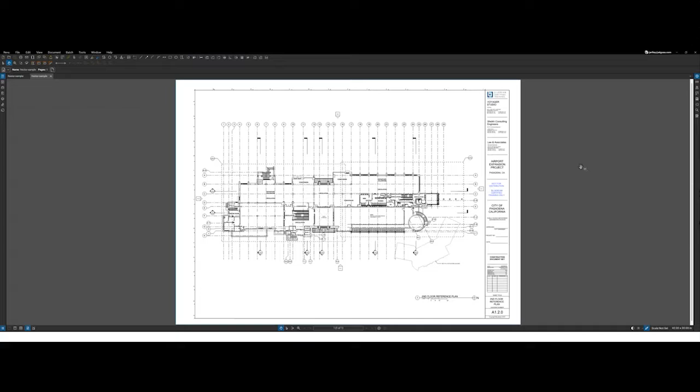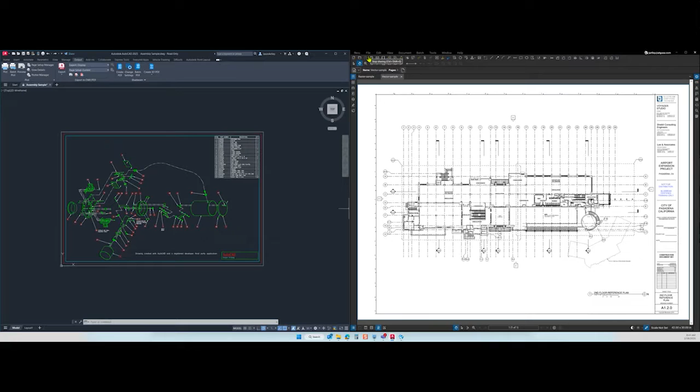While we're in here, let's talk about this. This screen size is why it looks stretched, correct? Yep, so if you were to get a larger monitor, this is a good keynote here, you get a lot more real estate on your viewing space. So if you were to split screen, which I know you will at some point, it's pretty cool. Well yeah, worth an investment of a larger screen, right? Yeah, it's the same as having two monitors, but there's no dividing stuff in the middle. What size is it? It's 34-inch ultra wide. They're really cheap actually right now. I tried to hurry because I thought tariffs were going to mess with things, but it was on sale, so not too bad. The price range is crazy, this was $250, they go up to like 2 grand, and there's not a whole lot in the middle.

So, but anyhow, let's go back. I would assume it's like hertz changing and quality, right? Probably, like your refresh rate is essentially what's happening with your hertz. So basically it's like 144, I'm assuming, and then you probably get more when you get higher up the line, past 144 you're probably paying more for that. So your refresh rate of your screen, I think, is essentially what this is. It was 160 hertz or 180, and then 1 millisecond response time, I think those are the specs.

All right, so I'm just sharing Bluebeam now. Tried to make it a little bit more aspect ratio friendly, hopefully that works well for our content.

But here's our sample, you've seen us share this file multiple times, but what's the difference between raster and vector? Somebody, I don't remember where I saw it, but there's actually reasoning behind the names, so that might be something to Google. I always think of what is it, the airplane, what's your vector, Victor? But yeah, you zoom in and things are crisp, that's the easy way to tell if it's a vector image, which also means it's going to be easy for Bluebeam to interact and snap to things, because it knows where to find those crisp lines.

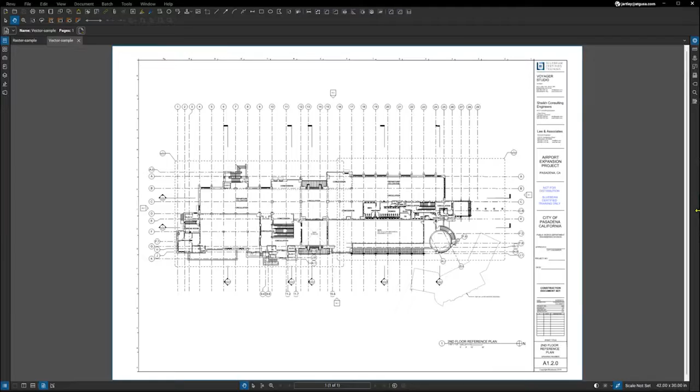They're not seeing the split screen. Not seeing the split screen? Yeah, I think it's frozen. Interesting. Cool, unshare and reshare. I had just shared the Bluebeam. Yeah, that's why. Give you both? Yeah. No. Okay. Yeah.

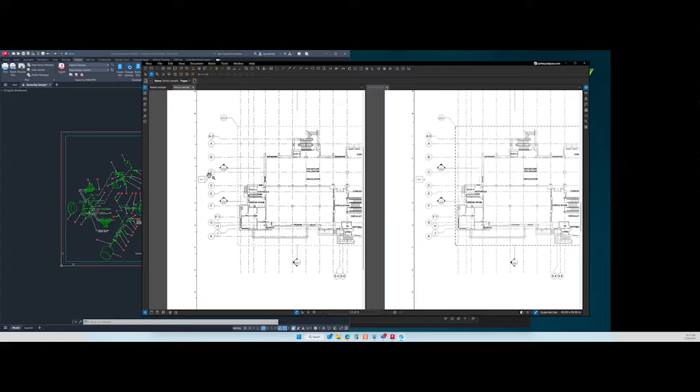But yeah, the old workflow. They're sending a PDF, somebody prints it out, they scan it, or they do their markups with a pen, marker, or pencil. Then they scan it and email it back. And when you email it back, you're going to get a raster image, which means it's going to look sloppy. It's just going to get worse and worse, and you're wasting time, you're wasting paper.

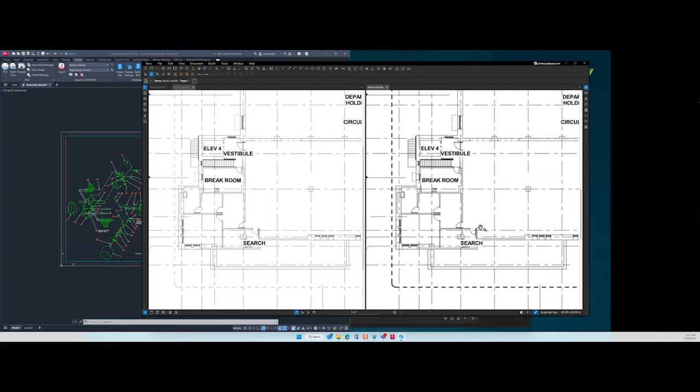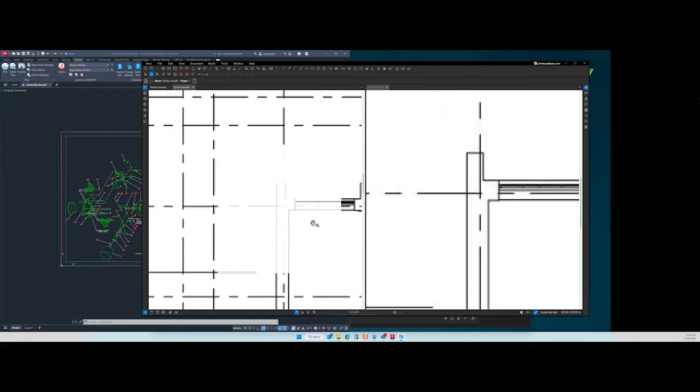I get the tactile feeling, I get the ASMR of wanting to write on paper, but you don't have to do that anymore, and the time savings is incredible. You can accomplish something similar. I had a conversation with a company where somebody was in that same vein - maybe not like feeling the lead against the paper, but a stylus with an iPad. Yeah, the Apple Pencil. And some of them even make that little noise. I've seen someone - it's like an electric car where it can make the speaker sound.

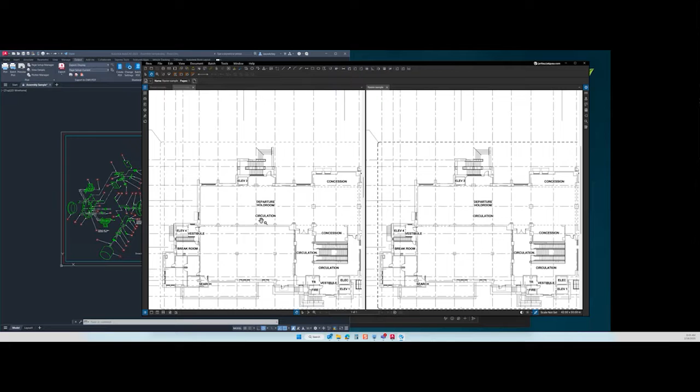So to address the challenge of reasoning about vector graphics, the visually descriptive language, or VDLM, uses scalable vector graphics (SVG) for a more precise visual description, and an off-the-shelf raster-to-SVG algorithm for encoding. The model aims to enable precise visual perception and facilitate high-level reasoning based on low-level perceptions. Additionally, differentiable rasterization bridges the vector graphics and raster image domains. So that's just a quick Google of the reasoning behind the names.

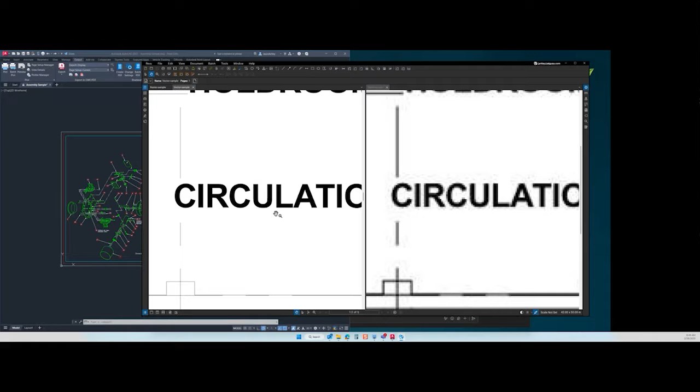Yeah, I'm not sure that illuminated anything for me, but thanks for looking it up. Okay, let's talk about another difference, a big difference here.

With raster, you lose that text integrity. Now you can go in and edit text on a vector-based one, right? So if I want to put a space there or whatever, I can do that. I cannot do that in a raster, right? Even if I run - where's it at? Yeah, it just grays it out.

You can't do anything. Also, it didn't really like me editing that - see how those characters didn't fully... Okay, now I'm confused. Hey, I had to hit email. Don't need to do that. That's really wild, why did it do that?

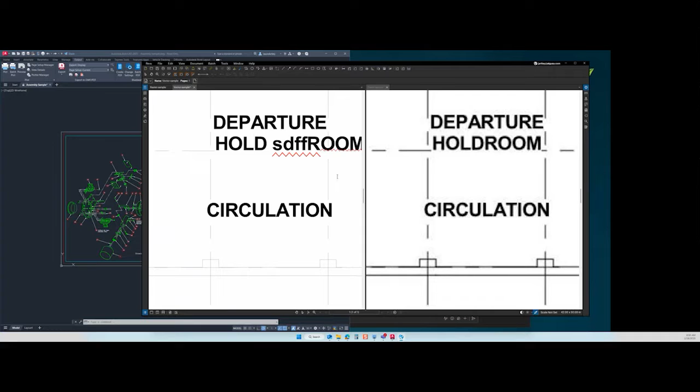You see that? So this was 'hold room,' right? But then I went and did this, and you can see the letters there. But when I cancel out, watch what happens. It says I'm misspelled, and then when I zoomed, it had squares. Now it's not doing it. There it goes, I clicked out. I think it's trying to save that data into actual text format, and it couldn't characterize it. That's a wild little bug.

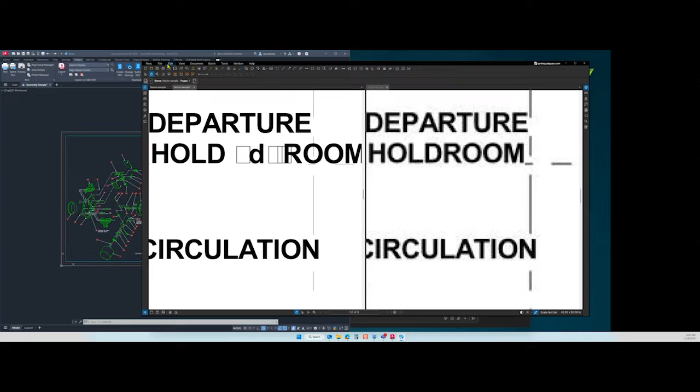They're not even the same size, right? Interesting. Well, anyway, assume I didn't do that. You can edit text. Now, if you have a raster...

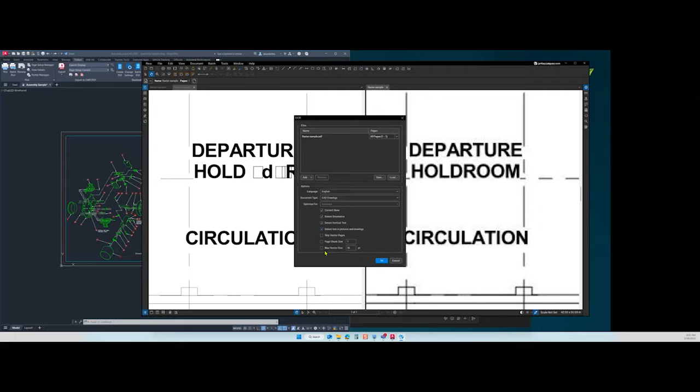I was going to say, you don't have to have the fancy version of Revu anymore to run OCR. Now we have the ability to run OCR on a CAD drawing, English, correct, detect... sure, do that. We've got no picture - yeah, we'll leave that on there. Skip vector pages, okay. Hopefully this doesn't take forever, it's just one page. But back in the day, you had to have the high-end version of Revu for OCR. Now it comes in the basic one.

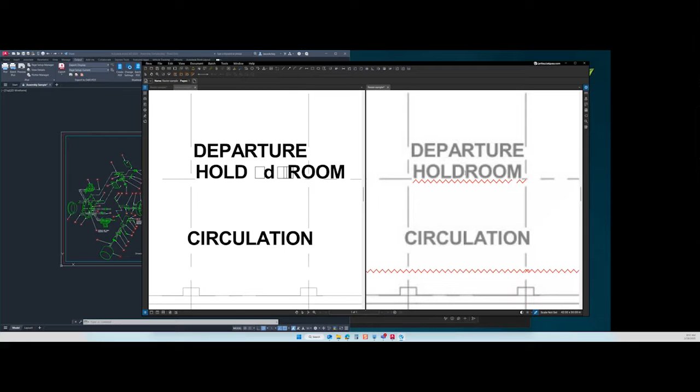So I run OCR. I still cannot edit text. No, right? So it says I can. It's trying to. It's not doing anything.

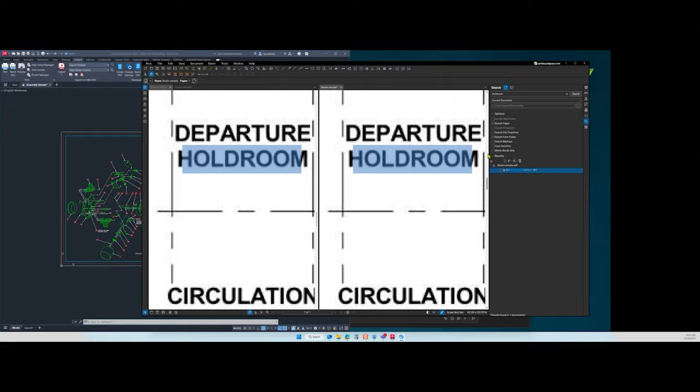Yeah, because what it does is OCR enables and enhances text in the image quality. I know people have asked about running OCR and being able to snap to content. It's specifically for text. Optical character recognition is the technology that converts different types of documents, such as scanned PDFs and images of text, into editable and searchable digital text. It says editable, but for some you may not be able to, depending on the quality of the raster.

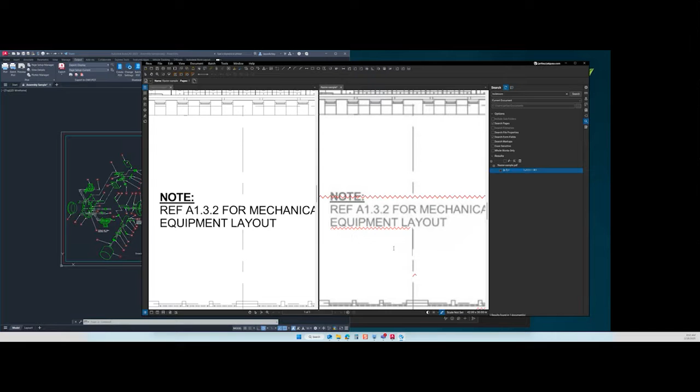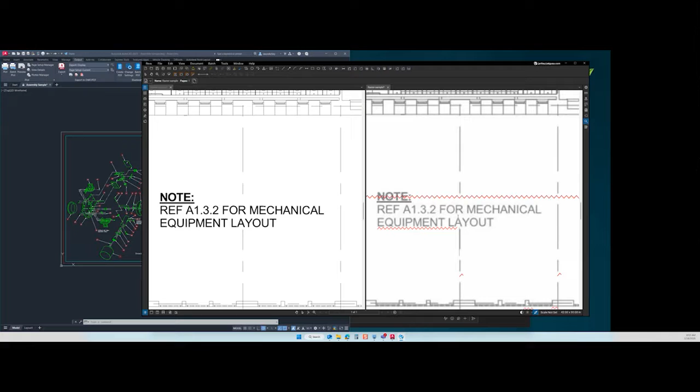And to come back full circle, a better explanation of raster, which may resonate more, is compressed pixels and raster images. So you have JPEGs, you have PNGs, which lose quality when scaled and is commonly used in photography in complex textures. Vectors are made of a path of mathematical formulas, vector files. So pretty wild. Yeah, it's not letting me edit any text.

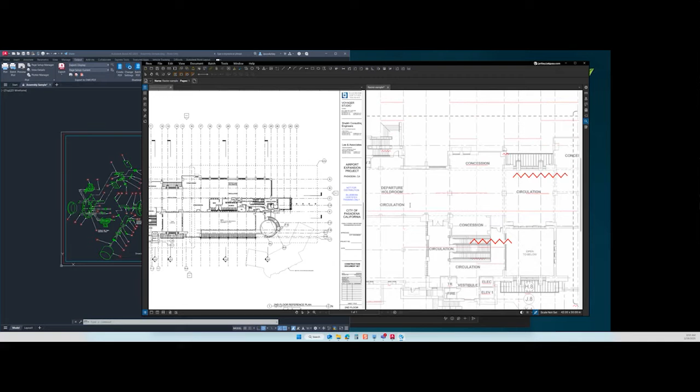You're going to be limited to scan quality, as you mentioned, DPIs and all that, and then also what fonts you have. Some fonts are Windows TrueType, which hopefully Revu does a little better with. But overall, OCR did make a mess of this drawing because it's trying to do spell check, and it's finding things that it thought was text.

Hard to tell, but it looks like it's trying to edit it versus just search it, right? So if you exit it, at least you can still select it. Yeah, it thinks that's an I though, right? There may be something in there from the CAD file that's underneath it, maybe.

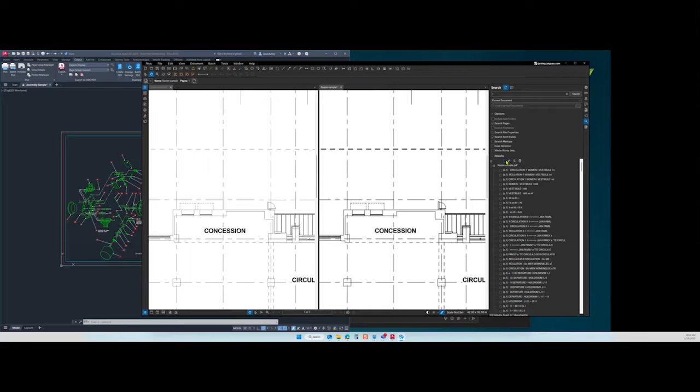Yeah, it thinks that's an I. All those dashes, interesting. So, I mean, it is what it is, but that could wreak havoc for sure. That was a fun little test.

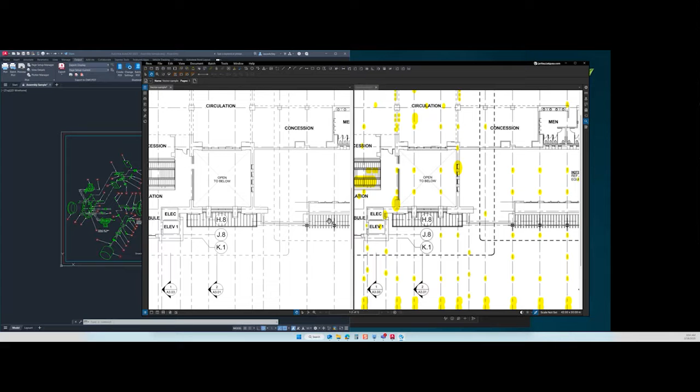What other things do we need to be concerned with if we're looking at raster and vector? When was the last time you were emailed a raster PDF? I actually just had a conversation yesterday with somebody who printed out of AutoCAD, and it printed out as a raster. So just be aware whenever you're doing your print settings that there is a selection box in your solution to make sure it's vector versus raster.

I'll give you all a caveat in Revit. There is a primary auto function to raster for shadows enabled. So you're going to automatically get shadows. If you put shadows on, you're going to automatically get a raster-based PDF because it's images for enabling shadows. But everything outside of that is typically vector, and there's a selection, just a yes-no parameter, or I guess not really a parameter, but code behind the export, where if you select vector, that's usually the default. But if you select raster, be aware you're going to have those issues when printing out.

So you can accidentally print via raster versus vector. There's a lot of different drawbacks, and since you said the A word, we're going to talk about it too, because Brian brought it up as well. I did that OCR in Bluebeam Revu, and it wouldn't let me edit the text in the PDF. Brian says you can do that in Acrobat, but I'm guessing it would still vary on the quality. I bet if I had a different raster sample, I might get lucky, depending on the font and the worlds aligning and dogs and cats living together, all that stuff, where I could edit the text in a raster in Revu, but this sample doesn't work.

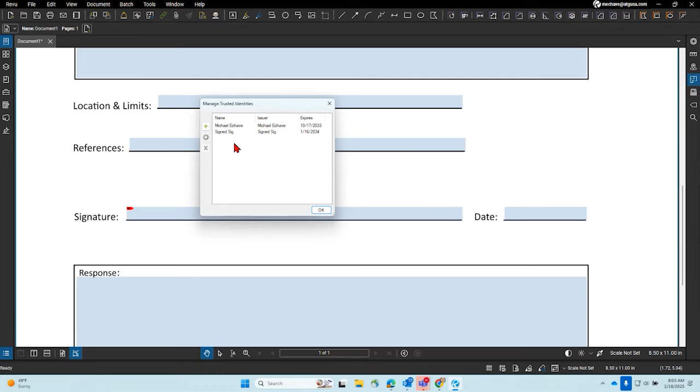It's either by the Windows certificate via Bluebeam - I guess I need to stop saying Windows - the validation and credentials from Bluebeam or from an external party member, which is saved to your computer. When we were talking about this earlier, and I was sending things to Jason when we did this at one point, it's these trusted identities that then you can see if it's validated when you're opening up the PDF again. Otherwise it's yellow, and we'll go through and show these examples.

So I'll save this as MCR. Look at my desktop - on your desktop is MCR, and there's already one. So what I'll do is I'll save it here, but I'm going to go through and sign it.

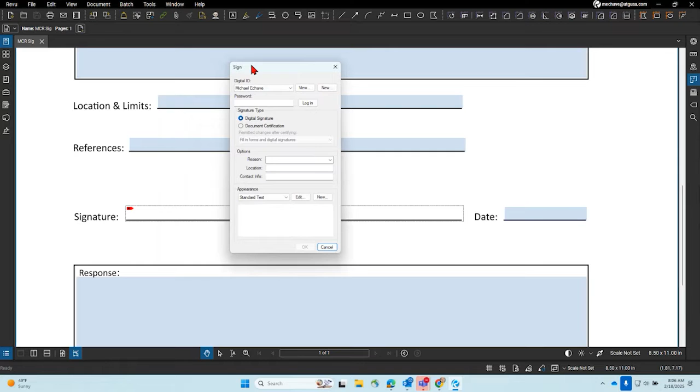Creating a digital signature is one of the things that you will want to do for signing PDFs in Revu, and this can be for authenticating your seals as well. There's a couple of different ways, we've done a bunch of videos on that, that's not where we're going to get to today. That's the wrong password - did I do that? Cool, I did that. So if I go through and sign this, you have to resave it over, so I'll just resave - yes, replace.

You have the ability to go and look at your signatures here, and this is authenticated because I have my valid authority within my local computer. I think, Jason, maybe you sign something, or maybe I send this to you - one of the two things that we could do. But we'll continue onward, if somebody's wondering from that perspective, we can send something to Jason. But if I go back to signatures, you can also validate your signatures and make sure that they are valid for what the location is for them.

You also have digital IDs - a digital ID is what it is, not trusted identities. So you want to be able to import these in order to authenticate what that checkbox is. Otherwise it becomes yellow. So if there's a different signature that's not part of this, it will be yellow because it's not valid yet.

Oh boy, this is an interesting topic, right? Because as Brian mentioned, and this has come up before, third-party certificate providers have reviewing agencies that prohibit self-certifying, but it's a Windows certificate. I'm not Microsoft, are you Microsoft? So is that technically self-certifying though? But yeah, Entrust is one that I've heard come up. There's a couple other ones out there too, but it becomes a big problem.

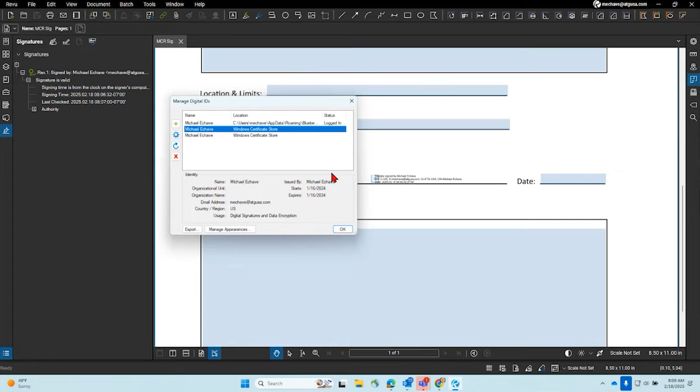Yes, so this is the downstream effect when people are using the data that's in there, is coming into here, creating a digital signature, signing, or there's also the ability to secure the document, but I think there's certify as well, which is in that same vein.

So you can certify a document without signing it. So if I redo a new one here, and we'll just do a fax form for this example.

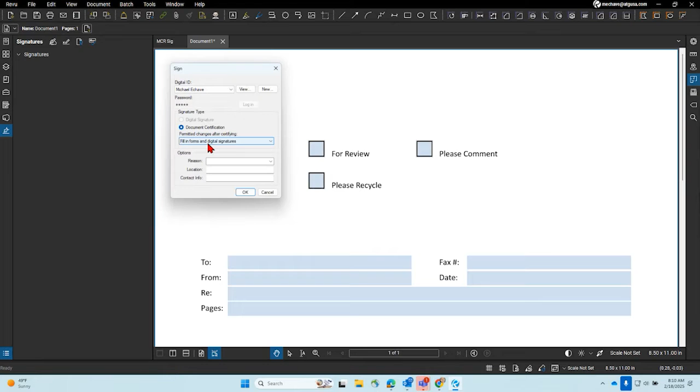But if I come into here and I say certify this document, this is essentially going to allow people to still do some things if you wanted them to. And what's the reasoning? I have not. Cool, cool, cool. So we'll hit this. It's going to ask me to save it.

Now I have a certify on this document, right? So it's given a blue indication that this is certified by me, which is also allowing editable for your forms because that's what I said, but it will create a pop-up for when someone receives it.

So there are a couple of ways to authenticate PDFs, one via signature, one via certified, but then it also comes down to those Windows certificates of when somebody receives it, is it truly authenticating it? So if I go to my digital IDs, what certificate are you using, third party?

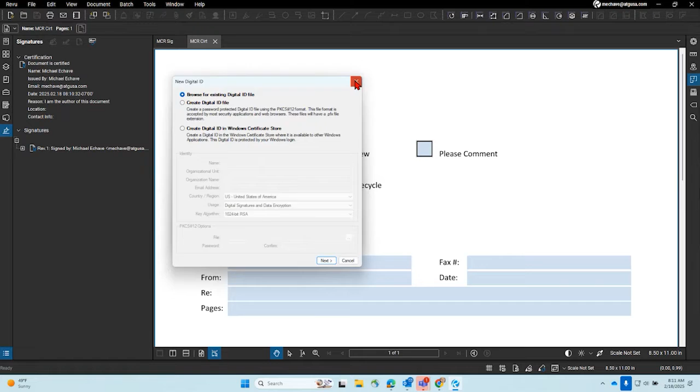Do you need to share it? Because this is where you would add somebody's, or create, well that one's create your own. But you have the ability to run through these certificates. So there's definitely a downstream effect when you go through and use some of these.

The other, yeah, wasn't there other locations to find the certificates in here? Wasn't there a link somewhere? Maybe. I thought there was like a place to go find more. I know there was, I can import, yeah, I can export mine to share it with you.

So whenever you receive a document from me, it's authenticated, right? You don't have any hiccups down the road. We figured that out. But this is something that is definitely being required by some municipalities, right, for submitting the CD sets. Now, those submitted CD sets are to the city.

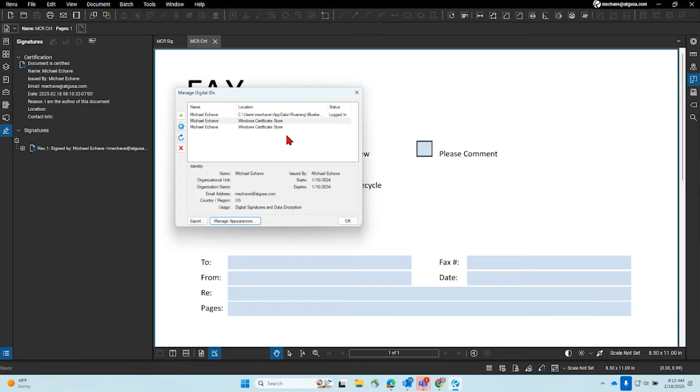Now, does that mean you as a firm can just send out sets that aren't certified to everyone else? Or do you have to send out the certified sets to the subdisciplines and contractors? That's a good question for the audience out there. So it's fine for the CD set, but not for the IFC set.

Yeah, so you would want to make sure that you're not sending forward to city, or well, you can digitally submit now, but if you were, I remember we had paper runners back in the day, right? Yeah, I was one of them. But basically, don't send the same forwarded set to everyone else, right? That way there's no downstream effect with locking down PDFs and making it more work for those end users as well.

Pretty wild. As Brian mentioned, some of these agencies don't allow you to self-certify, you have to have a certification, but it can't be self-certify. That's just... so you can't? Well, that makes no sense. What's a self-certified then comparative to what they offer? Isn't that kind of the same?

Do you have to use an add-in? It sounds like the signature certifying lobby has infiltrated these reviewing agencies. Because back in the day, just a signature was a signature.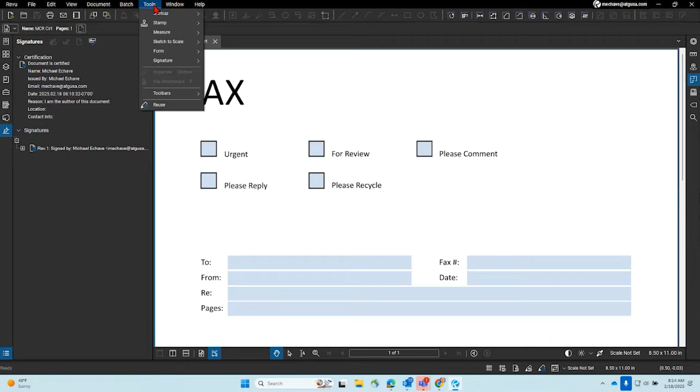So Brian, they have to purchase a certificate from a third party in order to submit to this particular reviewing agency. That is insane. It's not saying you can't self-certify, it's saying you can, but it has to come from a third party.

Self-certified is different from self-signing. I'm putting the two and two together. So you can have a certificate that's third party that's applied to the signature you're applying to the PDF. That was confusing to me - I thought signing was your certification, but your certification, which is authenticating the document, is tied to the signature. Does that make sense?

Yeah, but now you have to pay somebody to do this. Of course. That costs extra.

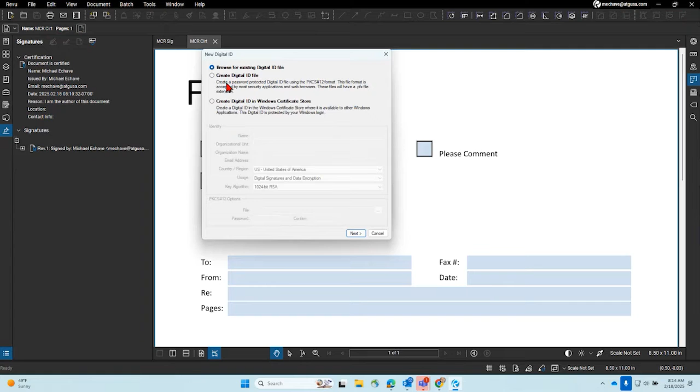So if you wanted to, you can do this from a Windows certificate, right? Or you can create an ID profile that logs to that file location itself. So if you're purchasing a certificate from somewhere else, you can still use that in Bluebeam to sign and point to that certificate. But as people are making us aware, they are requiring you to not use something like a Bluebeam certificate - they're requiring you to purchase a third party certificate.

Is this a Colorado thing, Brian? So it's 124 bucks a year is what he says. Wow, that's a little over 10 bucks a month for what? New Jersey - New Jersey is very complicated. We've been doing some work up there too, and it's like, where did this requirement come from? What's the rationale behind this?

It's probably saying ours are more valid, and they created some type of case against it, and now people are requiring it, which to me is so the municipality or whoever is receiving this certificate is saying that this third party is a more secure signature than your native local Windows certificate. So maybe they're worried about cybersecurity and being hacked, and someone using that Windows certificate where this third party hasn't been hacked yet, and they're validating that this is more secure. Maybe that's the reasoning - it definitely could be.

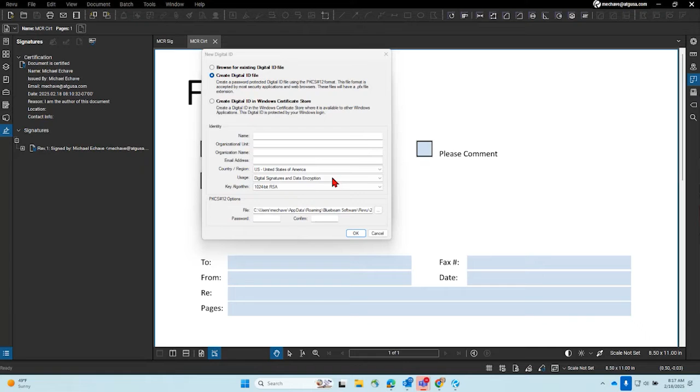We've talked about this before when we were talking about using Bluebeam Studio for evil - so this is where we're collaborating on a studio session or project, and I get fired, but I've downloaded a free trial at home, and I can still log in and mess with the plans while they're out for bid or construction, and change specs and edit the PDF in a devious way. I would never do this, of course, but this would prevent it, because if you were termed and you download on your local computer, that Windows certificate's going to be different.

So interesting. For third-party use, the browse for existing digital ID file option - looking for recommendations on getting those. The only one I've heard lately is Entrust, and I don't know anything about them.

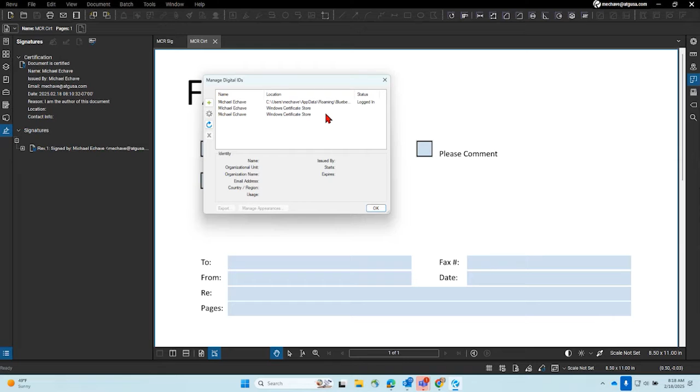We could do some homework, some Googling, but we personally don't deal with that because we don't stamp, sign, or seal anything here at ATG - that's been long past us submitting documents to a local jurisdiction. But we have been in conversations with people about how to tie those in. I don't think I've ever asked what is the best - I think what you'd probably want to know is what is required by wherever you're submitting, right?

Because I would assume that they have requirements and say you must use this. Pretty wild. So there's IdenTrust and DocuSign.

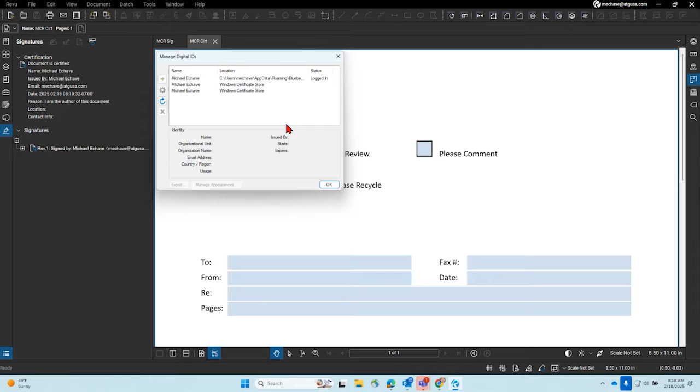But you can tie those certificates again. So if I wanted to tie my certificate to an area of wherever the certificate lives, you can definitely still do that if you wanted to.

You can also create your own ID with a Windows certificate. Bluebeam does create a Windows certificate, so if that's allowed, you can do that at 1024-bit RSA or 2048 RSA, depending on what key algorithm you can use for submittals. Bluebeam can do that natively via a Windows certificate, or you can get the PKCS number 12 format from whatever provider and download that locally to use that certificate.

It just comes down to what you're being required of and finding that information, because you can accomplish this still using Revu, since the only other thing you wouldn't want to have to do is open another application like DocuSign or something to sign it.

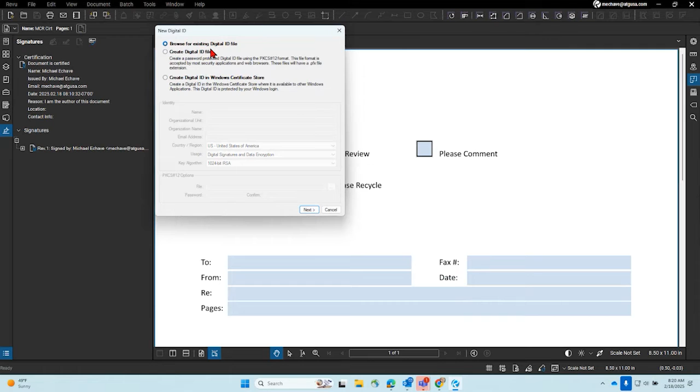So what happens when you go to that browse for existing digital certificate? Right here, it just points to that file up at the top, because it was telling you next. It's just a weird way to do it. So I've done them here, and this is just that Windows certificate based one.

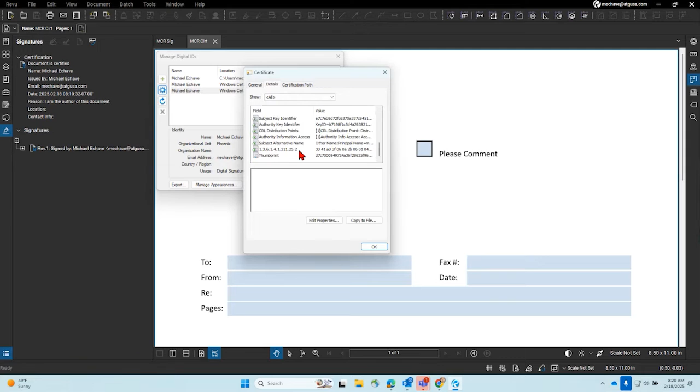I have no idea what this metadata certificate information is, but obviously this is a certification path here. These are your algorithm fields, it looks like, for securing the document, and this is like your stamp from the Windows certificate to authenticate. Interesting.

Yeah, I'm very curious to know some of the reasoning behind this. We're talking about stuff in the chat - is it a conspiracy, or is there validity to this?

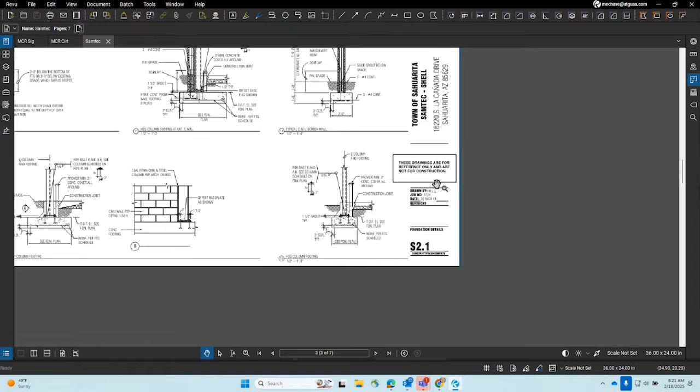So if I were to come into here, basically, if I go and seal this - which you would never do, I know people would screech at me for doing this because it's supposed to be a specific size, but I'm just doing it to fit this. So don't yell at me, I know.

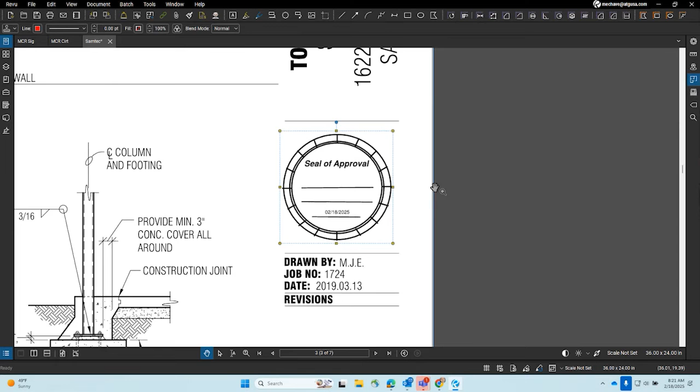But in here, right, this is what you would be sealing. So people can't do what I just did.

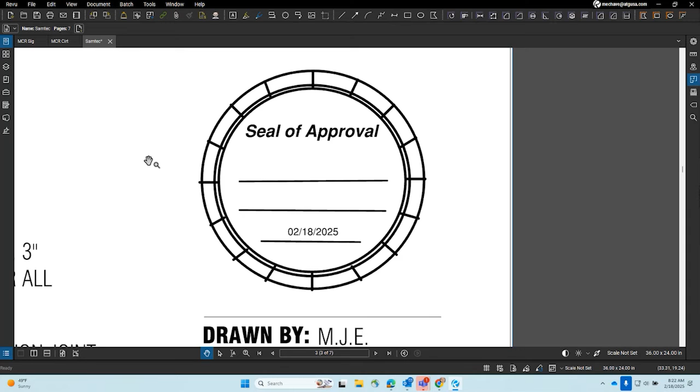But people need to have the data, and you can essentially use the batch sign and seal feature to accomplish this on every single page. But you can also use the same sequence of maybe including your signature with your seal and then certifying the documents - that's another workflow versus actually using the signature field to certify. You could just certify the whole document and create a secure path from that. It just comes down to what you're required of.

The old workflow, we had signatures in like Revit with a seal that were part of the title block itself. So I think it just comes down to what the requirements are, and you as the PE or licensed architect - do you feel this provides you more security, I guess you would say.

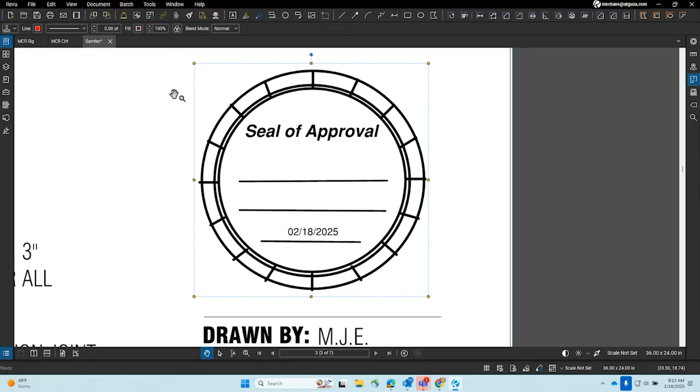Because you can do things like I just did, which is cut, edit, manipulate PDFs, and at the end of the day they want to make sure whatever you're submitting versus me handing in this set - that's what it comes down to. When I'm handing you this set, I'm saying this is the final set. When you're submitting it, this is the final set. Was it intercepted and changed anywhere along the road?

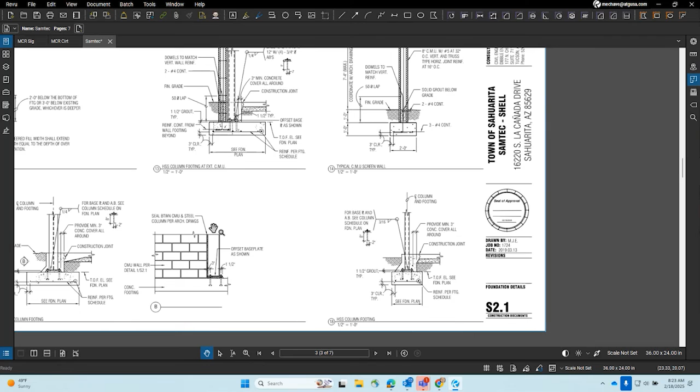Because it's a thing. Yeah.

So Brian's saying that DocuSign has the ability to issue a digital ID that can be used, but then you'd still use Revu to sign the document - you wouldn't sign it through DocuSign. You would just use that asset that came out of DocuSign and use that in Revu.

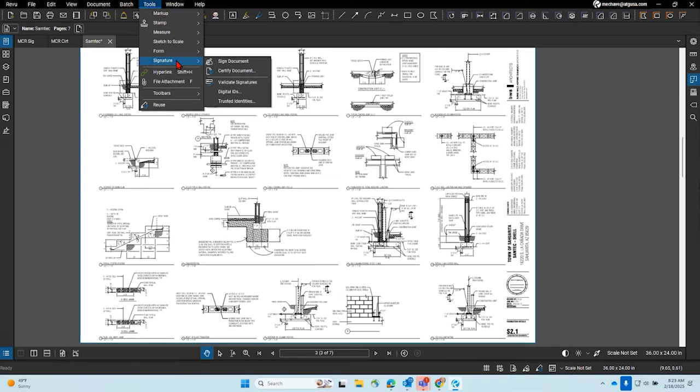Yep. And in order to get that into here again, you just come down to your digital IDs here and you can add it - a new one - and then point to or create your own.

And then when you go to sign, just be aware of whichever one you're grabbing, right? So if I came into here and I'm just going to do this as a manual - but before I do anything, these save over. I've ruined many data sets this way.

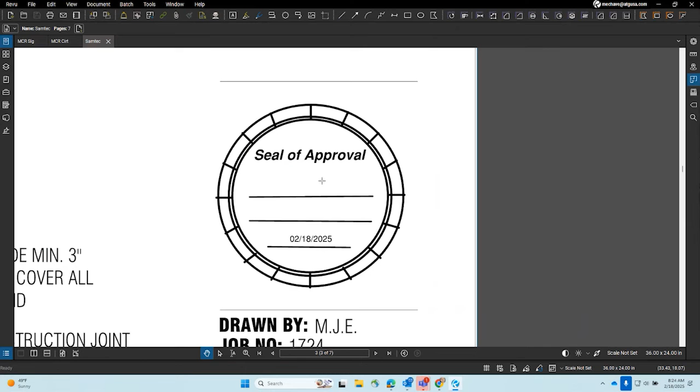Let me go in and create a signature in this area. Right, it's whatever ID you just created. Which one of you is it today? I don't know, we'll go to the very bottom.

You can view these, just to verify that this is the right one you're using. You can also hit new here, so you can sign it or certify. I'm going to create a signature, and you can always change these appearances.

So that's not going to be me today. Did I have this one that's edited? Maybe it's the middle one. Nope. Okay, so I don't have one. That is my terrible... let's see, signature. I think I have one that we can use, I'll show you the workflow for this.

Just let me verify, how are we on time? You have 5 minutes.

So while you're looking that up, I want to bring up what David put in the chat: from time to time receiving documents that have a live stamp in them. Be very, very careful with this. If you are putting a seal in your drawing and you know it's going to be sent externally, flatten your document first. That way it's going to embed that stamp into the PDF and not allow that manipulation. We can always erase it later, but there are ways that nefarious uses of Bluebeam can happen, and we don't want to encourage that anyway.

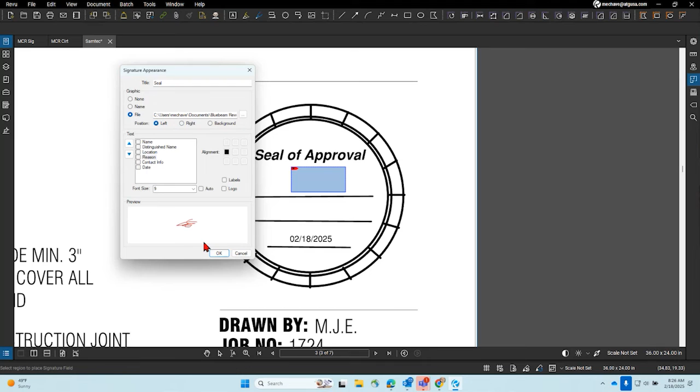And then what I'm able to do is hit OK. So now you have different appearances: you have standard text or you have this. I can hit OK and then save it back to my desktop, overwrite it, replace it, and hit OK. And now there it is. I can come over here and I can see not yet verified.

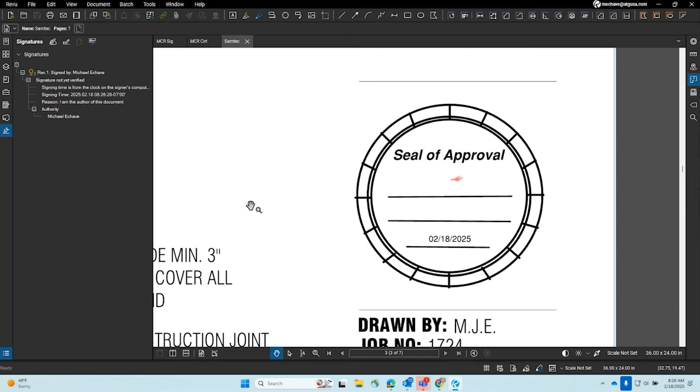There is no perfect workflow for this. So if I close it and reopen it, it should be verified, if you can keep track of your files. Oh, and there's that pop up. There you are. Magical.